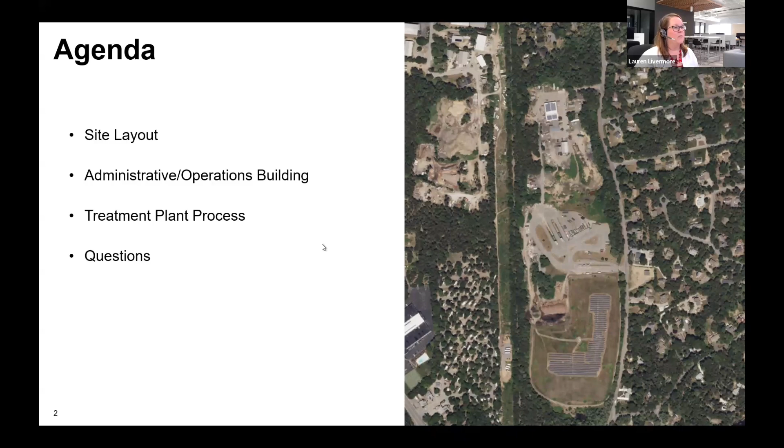Next, we'll go over the administrative slash operations building, which we do have some architectural renderings and some first floor layouts of. Actually, the whole project is going to be done in Civil 3D or Revit, which is a 3D modeling software. So the other buildings will have 3D renderings and isometrics available for town meetings. I don't want to say this town meeting May 5th, but for future meetings, you'll have some nice renderings to share. Then we'll go over the treatment plant process, and then feel free to ask any questions. And of course, feel free to interrupt me if you've got a question. So with that, for the people that are in the room, do you have a hard copy of the drawings?

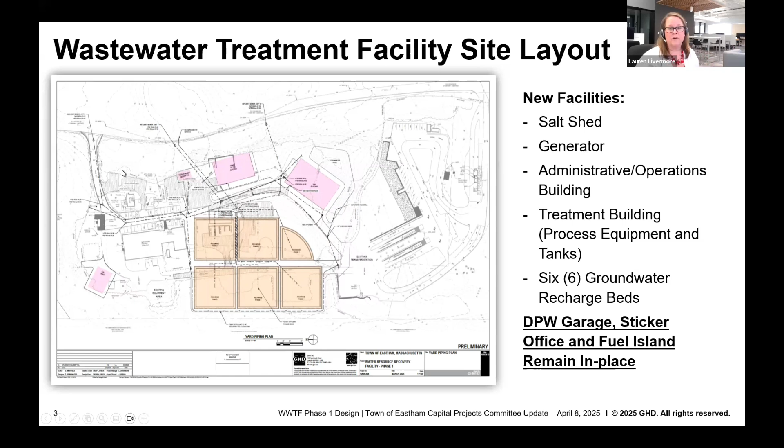So here is our overall layout. Just a note that the DPW garage, the sticker office, and the fuel island will remain in place once this is built. So we've essentially left some space over in this area for the future build out of a DPW facility when you guys decide to do that down the road.

So this is a bit of a zoom in, and to make things a little easier, I put some boxes over it. The existing salt shed is in this general area right here, so we will be moving it over to this corner. This driveway will stay as is and should be an easier in and out and turning for your staff.

We have a generator planned, however, based on our 30% design, we haven't gotten to all the edits. This will most likely move to the other side of the administrative building, just so it's not near the parking, and we have ample room for the DPW facility in the future.

This is our administrative and operations building. This will be the public facing side where the DPW offices will be, where residents can pay their sewer or water bill, so that will be on this side of the building. The other side will be some of our process equipment, filters and disinfection.

Over here will be our treatment building. I have another drawing that will go into a bit more detail, but it essentially has some process rooms on this side, and then open process tanks on the back end over here. There is odor control on these tanks in certain areas - we'll be putting covers on the more odorous areas to prevent that from being a nuisance. And this is our groundwater recharge bed area.

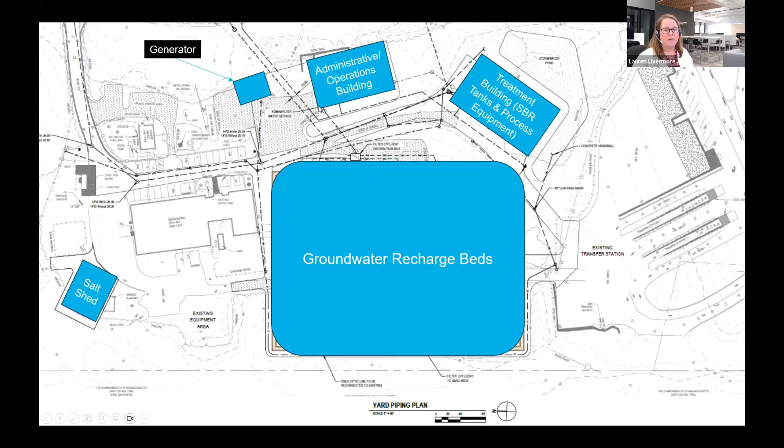So this is our administrative and operations building. As I showed in the last drawing, this shorter part of the building is the public facing side, so that will be this one-story structure over here where the offices for the DPW and the operations team will be. Again, over here is our filter building and other processes. We've got a little overhead door over here to get things in and out.

So these are some of the types of renderings that we'll see that are produced in Revit as opposed to AutoCAD, for those who are familiar.

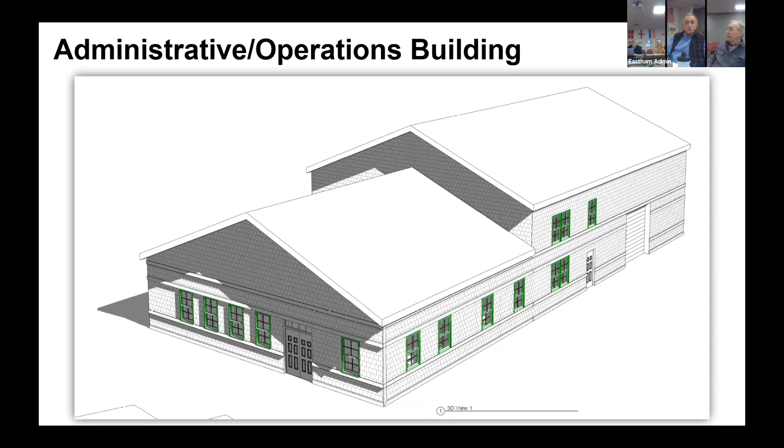From a funding standpoint, are we mixing DPW with the sewer groups, or is that an issue? Operationally for us, it doesn't make much of a difference - I think it's probably a net positive for us. One thing we need to work out is the floor plan, and that's one of the things we took away from the 30% design meeting, making sure it meets our needs. But the concept was to have DPW admin in this building, including water, so you have one spot to go. Does that affect our funding at all? It's not - there might be a piece, strictly theoretically, that we'd have to pay for ourselves that SRF or another entity would pay for, but hopefully it's negligible. It's similar to a building school project where some of the building is preserved - but the current operations for DPW are in that building. We're not talking about everybody, we're not talking about highway staff - we're just talking about administrative staff, so it's literally 2 or 3 offices extra.

We are actually currently working on some of the edits from the 30% design, and had a brainstorming session ourselves with our team. I really was hoping to get those today, but they'll probably be at the end of this week, is what we're anticipating, and I'll forward those to the town.

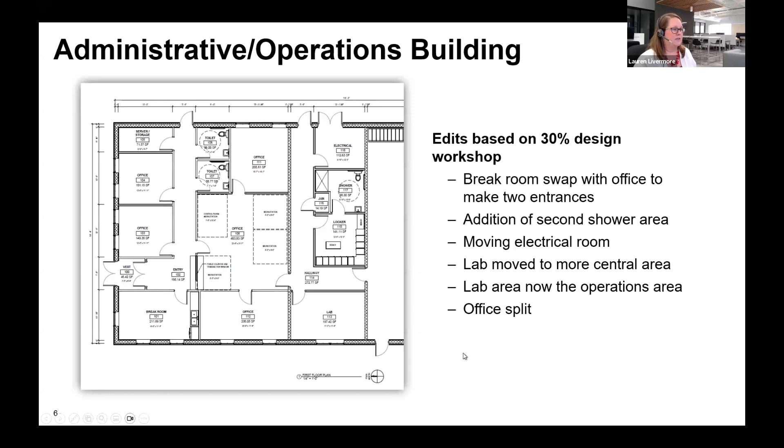One of the things we talked about, which we would like to do anyway regardless of this: if you drive by there, the fencing is a bit old and in disrepair, so we take the opportunity to upgrade everything. As part of this project, we really want to redefine and rehabilitate that whole boundary buffer.

I got a call from someone that lives on the corner of Bracken and Orchard, I think, and they were like, where's this gonna be? Am I gonna see it? Well, the neighborhood is upset, so they've been trying to get together and talking about it.

That's one of my notes - before we go to town meeting, we have to sit down and have a meeting about that. It's hard to say exactly what it looked like, but I think it's important for us to commit to the town. It's a 100-foot buffer. It's not what it ought to be right now, and we're committed to making it better as part of this project.

It will be visible at times based on tree cover and the time of year - vegetation, obviously, in the wintertime. I don't know if there's an opportunity, I'm sure it's something we'll have to go through, but if there's an opportunity to introduce trees that don't lose their leaves, I don't know.

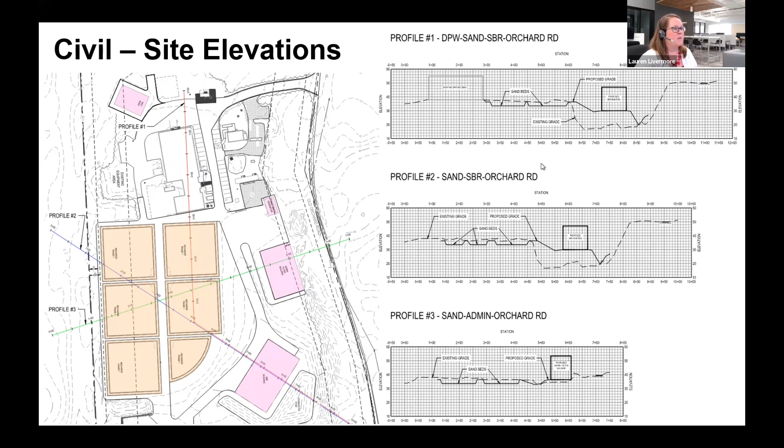Lauren, I saw the floor plan. Without getting into the details, I never had a chance to review this yet, but it looks like you only have one locker room. Is that right? Yeah, so we were trying to save on space, partially for the fiscal aspect. But what we are actually doing instead, we are having a combined locker area that people would grab their clothes out of, or their lunch, whatever they're keeping in there, and then we would have two separate shower facilities.

So what we're looking at is essentially if you moved this whole section up and you put another shower facility here and added a door on the side. If there's a particular request one way or the other, we could add it, but to save on space, we left one locker room because we're not anticipating more than a few operators for this size plant.

I wonder though if the code review would require one for female, one for male. Our architectural staff did look into that, and he was the one that actually suggested this one only. I'd have to get back to you on the specific codes. I know there's been some changes over the years, but these would actually be two gender neutral bathrooms over here. And at this time, he was suggesting this, and we all kind of agreed that it would be better to have two shower facilities. And changing, right?

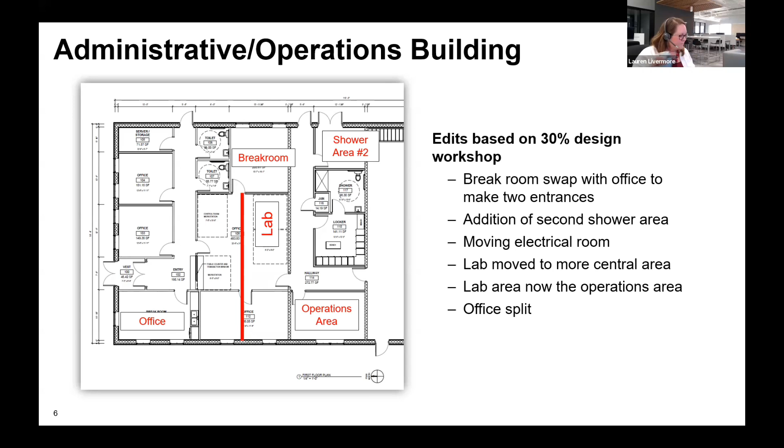Okay. Any other questions on that before I move on to the treatment plant processes? Okay. So this is basically a quick overview of the facility process, and then we'll get into some of the details. Just not knowing everyone's familiarity in the room, we'll just go through it really quick. Obviously, collection system, I think we're all good with that. It's going to collect sanitary sewage from homes and businesses. Lucky in this area, there's not a lot of industrial sewage, or basically none that would be coming in. So it's all domestic sewage that would be entering this treatment plant.

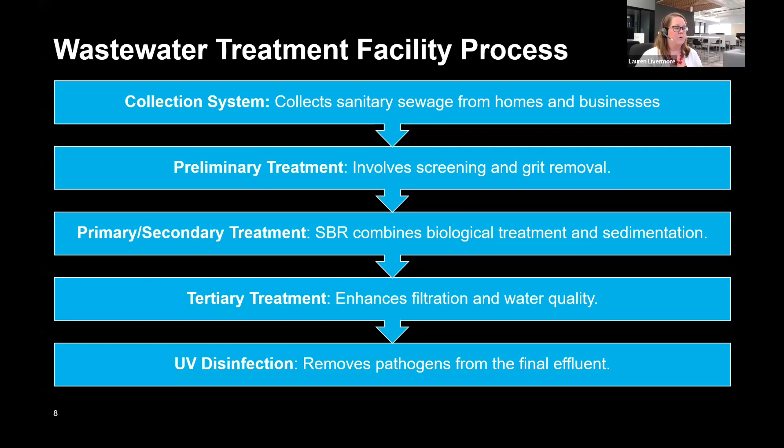So moving on to preliminary treatment. So this is where the screenings removal and the grit removal happens, and I'll get into a little bit more detail on that. And then we have primary/secondary treatment for this proposed treatment plant. This is actually combined in the sequencing batch reactor, or the SBR treatment processes. And I found actually a great little graphic on one of the manufacturer's websites that I'll show to explain how that works. Tertiary treatment is essentially to enhance the water quality and the filtration aspects, to be that final polishing step. And then after that, it goes through a disinfection process, which will be UV disinfection or UV radiation.

So first, to briefly start out with the flows and loads. And again, some of these slides are in the PowerPoint that you have right now. So our design flows are based on the extent of sewered areas that were proposed by the town and Apex for phase 1 and phase 2, those maps that Hillary was talking about. And the treatment equipment needs to cover the range of a minimum day to a maximum day flow. So we need to make sure that the plant will work for times when it's off peak and it's just starting up and there's not a lot of flow coming in. And it also needs to be able to handle the maximum day flow that you would see once you've got all of your areas sewered and you're having a busy summer day.

So then the conveyance equipment, such as the pipes, the pumps, the tanks, needs to be sized for the peak instantaneous. So essentially, if you've got more flow coming down the pipe because everybody flushed the toilet at the same time, your plant needs to be able to hydraulically have the capacity to handle that, so you're not overtopping tanks or anything like that.

And really the reason why I mention that is that obviously we're trying to balance the design of phase 1 versus phase 2. When we had originally looked at this project a few years ago and gone with an SBR system, it was more of a half of the flow would be in phase 1 and half would be in phase 2. So we were thinking 2 SBR tanks for phase 1 and 2 for phase 2 that we would build later. However, with the slightly adjusted phase 1 and phase 2 that was completed last year, we're looking at more of 2/3 in phase 1 and 1/3 in phase 2. So that kind of made us look at some of the concrete structures and things a little bit differently. So you'll see that there is 1 extra SBR tank that we're going to use as an equalization tank right now. And there are some areas where we have the ability to add additional blowers or additional pumps when phase 2 is installed.

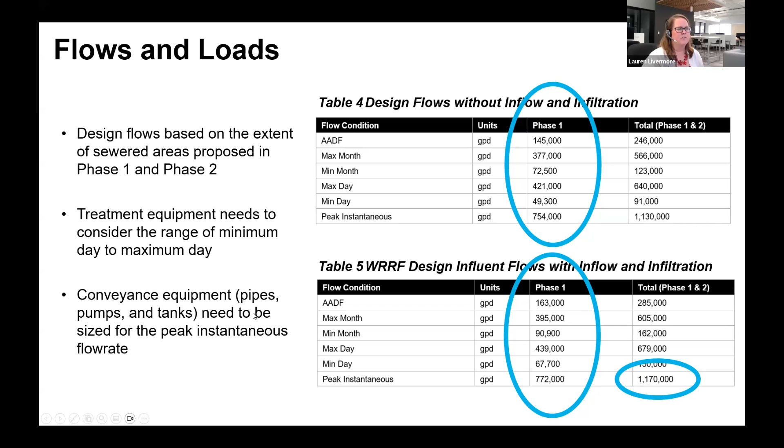So this is what we're focusing on for phase 1: our average annual daily flows, our max month, min month, max day, min day, and peak instantaneous. So this is what we're mainly focused on with the treatment processes for phase 1. However, as I mentioned, since some of the tanks are including phase 2, we need to consider this phase 2 peak instantaneous flow. So just something to think about as we explain the design.

So for preliminary treatment, we will in phase 1 be installing a mechanical bar screen. So that will automatically pick up all the rags and other screening items that need to be taken out of the flow to protect the downstream pipes and equipment.

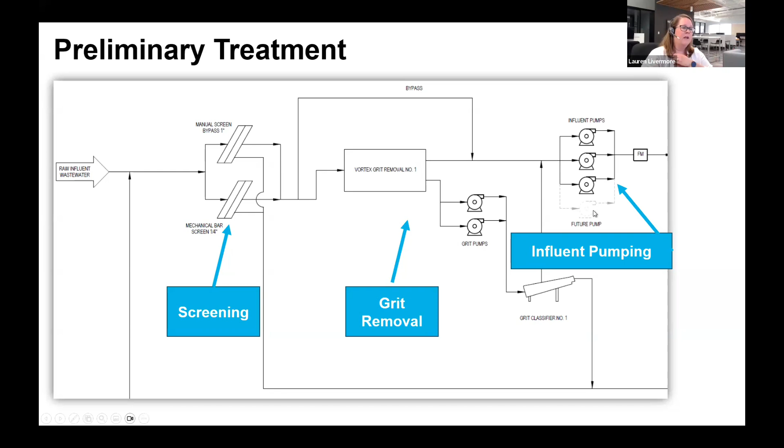And from there, it will go through a grit removal system, which is a vortex grit removal system, and I'll show a picture on the next page. And that one will allow the heavier sand and gravel to drop out and also be taken to most likely a landfill. And then from there, as Ziad and I were talking, it will be pumped up into the secondary treatment process.

Can I ask a question right here? Yeah. So I read about the grit removal and the sludge. And so how many pounds of solids are we going to be trucking off site? Give me, say day, month, give me a number.

Yeah. So say that again. So whether it's a day or a month, what do you think we're gonna be trucking off to a landfill? And that's gonna depend on the time of year too, right? Right, based on the flow coming in. Sorry, for, I don't know, for 100,000 gallons of flow, I guess. Okay. So I think everyone was kind of talking at once. So if I missed it, let me know.

But for the sludge, so when I talked about solids handling, the sludge comes off the aerobic digesters, and that will be in the beginning of phase one. That should be like a sludge hauling tank. So think of like maybe a septic hauler. That'll be 2 to 3 times a week that sludge will need to be hauled off site. And then at full build out for phase two, it'll be approximately 1 truck a day. So seven days a week that sludge truck will come in.

And that's some of the things that we're looking at right now, what other facilities are doing, from land application to sending it to, I believe there's a couple of incinerators in the area as well. So that's how the sludge is handled.

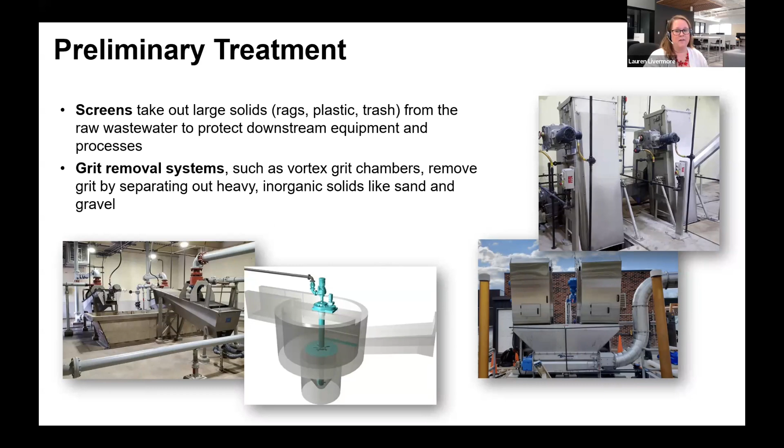Any more questions on that? Okay, I know it's getting 4:30. I hopefully won't take up the next half hour.

So next is our generally secondary treatment process, but really an SBR system does have sedimentation in it as well. So if you look on the process flow diagram, we have the flow being pumped up to our pre-equalization tank, which is actually the third SBR basin for the future, but we'll have an added benefit right now of being able to accommodate differing flows as the treatment plant and everything from the collection system comes online.

So we have our 2 sequencing batch reactor tanks. We do have some chemical feed to help in settling out some of the solids. And from there, we have some of the sludge pumped to the aerobic digesters, and then the rest heads off to a post-equalization tank, which I'll show next. So I found this visual explanation of what an SBR system does, in case you're not aware.

So essentially, you put sludge into an activated sludge process. In here are essentially all these bugs that eat the organic material in the sludge. And when you turn on the blowers, you need to have oxygen for the bugs to consume the organics. Essentially, they use that as fuel. And then when you want the system to go through its cycle and allow the sludge to settle out, that's what they're calling clarification. So you're allowing your sludge to settle out.

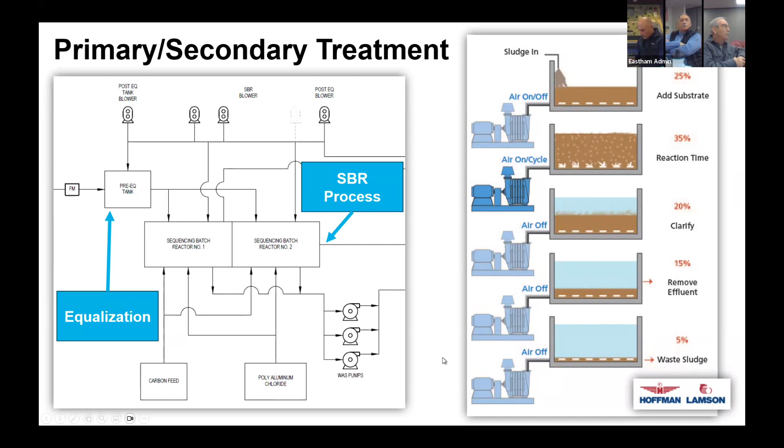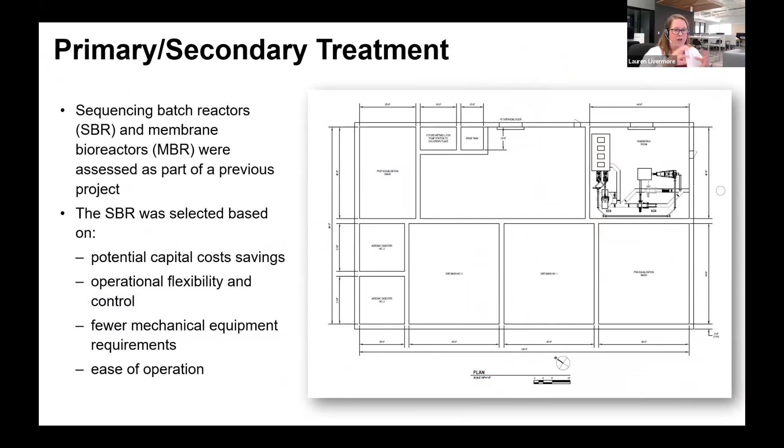And then it goes to those are the same digesters, those big things I see at Deer Island? No, these are much different. Those are probably what you're saying are anaerobic digesters. These are aerobic digesters, so with oxygen. So these digesters are actually right here.

So this was our headworks room where we had the screening and grit, and then it would get pumped up into these SBR tanks. So here's what we're calling our pre-equalization basin, to have this extra tank for phase 2, and also to be able to use it as kind of a swing basin right now to help with flows that are coming into the plant. And then that would go over into your main 2 SBR tanks. Again, they can fill and go through the process.

And then the sludge gets pumped into these 2 aerobic digesters. And they would most likely have a fiberglass cover on them that would be connected to the odor control system. And once this SBR tank goes through its process, it will go to the post-EQ tank and then gets pumped up into the filter building.

So this building was actually maybe turned around if we were looking at the plan. These tanks would be, I don't want to say open because we might be covering them for odor control, but this would be an actual building up here, and this backside would be the tanks. And we need to have an area for the sludge truck. They would come and take the sludge from this area right here. And this process equipment room will have blowers, with space for additional blowers for phase 2, as well as some of the chemical equipment that we'll need.

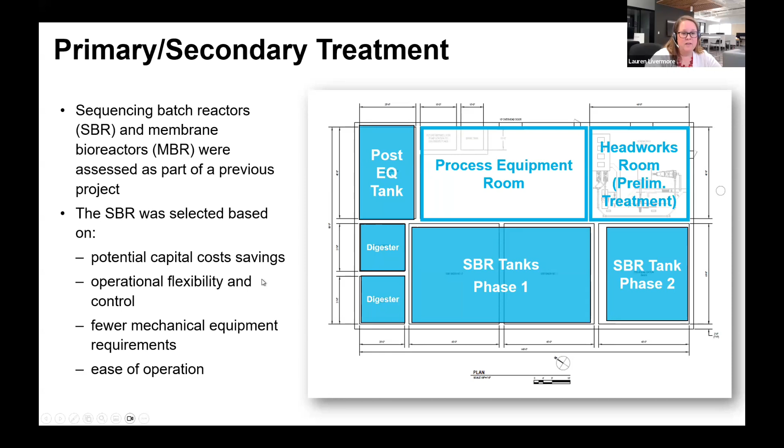Any questions on that? I'll try to keep going. Okay. So tertiary treatment. So we talked a little bit about that. So on that previous page, our post-EQ tank on the drawing, that's right here. And from that point, it'll get pumped up into our cloth media disc filters for tertiary treatment.

And essentially what these do are filter out some of the remaining suspended solids and other constituents of the wastewater so that the plant can meet its effluent limits. We're also looking into, as I mentioned before, we might have some intermediate pumping to be able to get through an activated carbon system for the removal of PFAS. But we're still working on a few of the details here.

The SBR plant by itself is expected to meet some of the permit limits. But to make sure that happens, these extra polishing steps are something that are used. And carbon actually has the ability to take out some other constituents like PFAS. That's what they use on the drinking water side, GAC systems, or granular activated carbon.

We'll have a plant water system that will be able to provide some of the water for certain processes, so that you won't have to use the water that you're just pumping. We'll be able to reuse some of that on the site for areas where we don't need potable. And then we have our UV disinfection system. And so to get in some pictures of that to make that a little easier.

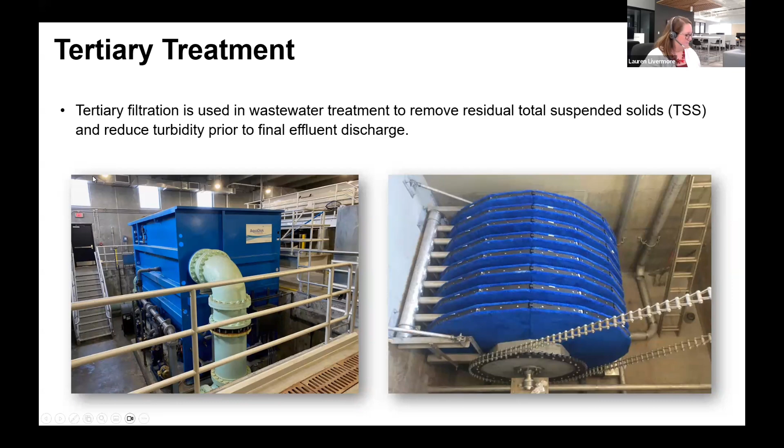I just had a quick question on the prior screen. Yep. The carbon unit, can you add to that in the future if need be? Will there be enough room to increase the size of that? I want to say yes. Are you saying for like future parameters? Yeah, I'm just thinking of future requirements that might come down where we know carbon is one of the solutions.

So right now we're looking at a couple different options, and it does take up a good amount of real estate, but we could allow for additional space in the building to be able to accommodate that in the future, like leave a little extra. I think it would make sense. Don't quote me, but I think the tanks are not short, and they're not small, and I can't remember how many we need. Again, we're looking at 2 different options. The one option we wouldn't necessarily need to pump, but the other option that's a little bit more condensed as far as a footprint, we would have to pump into. Just thinking about the future. Might as well do it now.

Based on Hillary's question, do you normally design a certain percentage increase for future regs that come through? In use of vessels, I would imagine, right? So right now there's not actually PFAS regulations that we are able to design to. And there's some debate on whether you go after the wastewater treatment plants, since it's actually like a pass through, or if you go after municipalities that might have significant industrial users, SIUs or CIUs, that might actually be putting PFAS in the water.

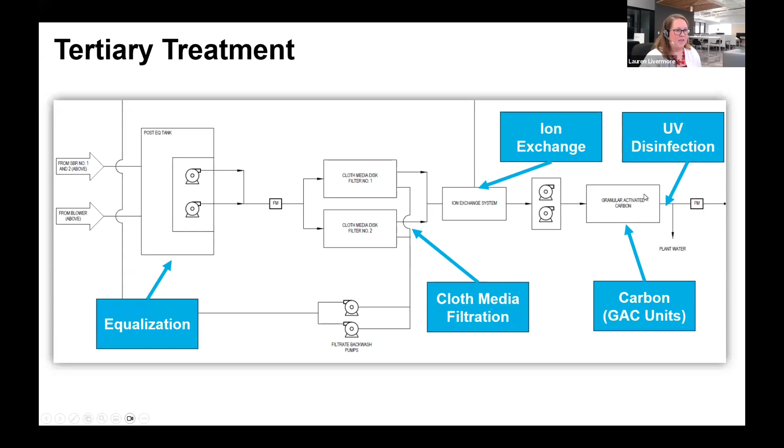Okay, I was going through some of the pictures. So those are our filters. And then for the 30% design, I kind of just showed these contained units, but there really are a bunch of different options for UV disinfection. I'm anticipating for our system it's going to be one of these. So this is just one brand out of many, just trying to show some pictures for clarity.

Some of the larger facilities have the ability to have a larger channel - that might be in one of the process buildings. There's the potential for the UV lamps to be vertical. Just to back up for those who don't know - UV is a disinfection process that inactivates viruses and pathogens from replicating or infecting. So in theory, the bug is still in there, but it's just inactivated, as opposed to chlorine disinfection or other chemicals that are used.

So this is a potential way of installing it - the lamps are put in a more vertical or angled fashion. There's these Trojan UV units you could stick in as well, a number of banks with a horizontal lamp. Or you can have a smaller unit in a channel, more of a steel open channel. Based on the size of this treatment plant, we might be looking at something more like this, or a closed vessel system. So our team is finalizing that design.

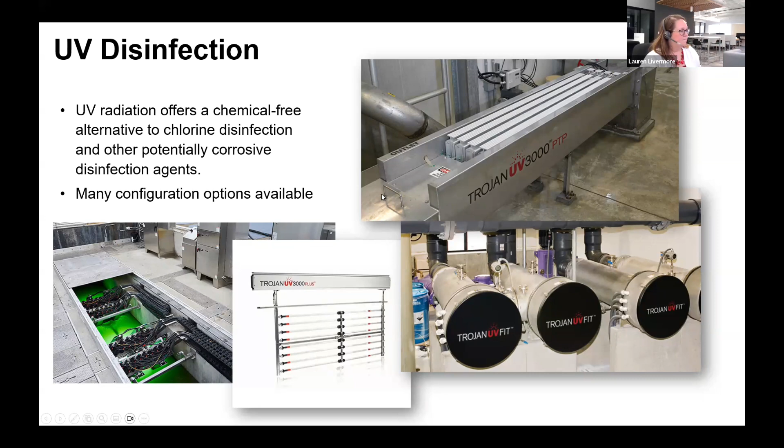So last, after disinfection, it will go to our effluent distribution box and over to the recharge beds. If you remember from the initial site plan, we've got 5 recharge beds of the same size, and then one that's a little bit smaller, just to make as much use of the available land as possible to get our treatment in there. So there was a lot of work that went into the design and eventually the permitting of the effluent sand beds.

That's a hydrogeo report that we are almost finalized. I know the town reps - Rich, Jackie, and Hillary - have seen a lot of our progress on that as we went through some of those iterations of the model. This basically shows how much this particular land area can accept for wastewater recharge. We had our test pits and perc tests completed, I want to say middle of last month, and the DEP rep came out and was very happy with the soils he saw. So we're on a good path there.

So those are some of the next items coming down the pike to the group. There was a number we were trying to hit per day. Those 6 beds will cover the amount of effluent we need for both phase 1 and phase 2 on a daily basis. What the Mass DEP looks for is 5 gallons per day per square foot, and we thought we could go to 9.

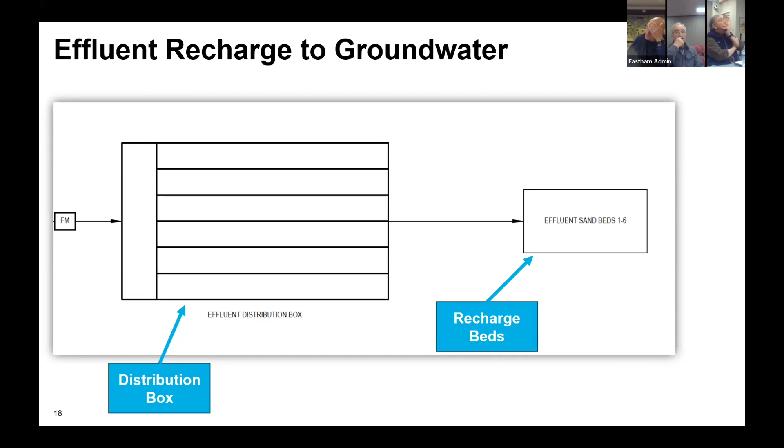We did start mentioning other sites, like I just said, potentially Children's Place. I think in the original scope of work, it even presented the different sites that were looked at for the treatment plant itself. So I guess, to answer your question, yeah.

Sorry, go ahead. I think Fred was asking if the treatment plant currently can accommodate future phase 1 and future phase 2. The 700,000 that they're talking about will stay on this area, this site, correct, for this phase, right? So I believe — I want to check into this — but I believe almost all of phase 1 could go onto the DPW site.

I think we are working on getting the final data from the wetland specialist to see how the mounding could affect that one wetland. That's really the key factor — the crux, the critical success factor.

So we had gone through a bunch of iterations with the modeling to see how it would be affected at different flows. So the hydrogeo report definitely has that in there. I don't have it memorized, so let me get back to that. But it is designed for 5 gallons per day per square foot and would be the bulk of phase 1.

And again, it's going to be a slow fill as the collection system is built out and all the different houses and businesses connect. So you've got time to see how the recharge beds are doing, and similar to other municipalities, ask for additional recharge flow. Right, but your hydrogeo report is only for phase 1. Correct.

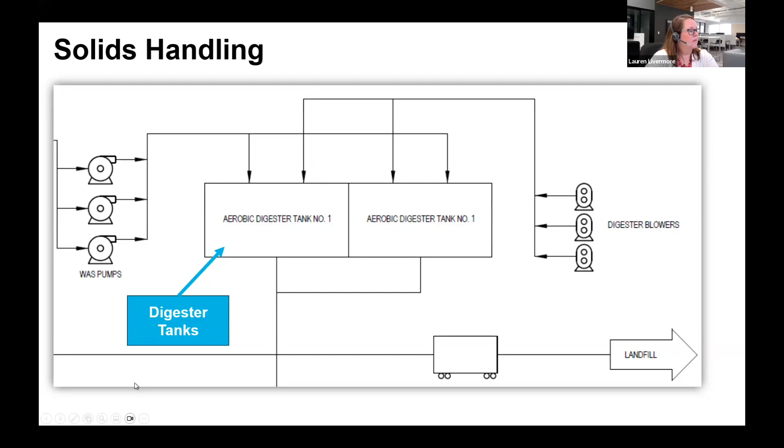And this actually had another line to it. So this is what would be hauled off by a sludge hauler, either to incinerator or land application, or whatever's agreed upon. And that's all I had.

Thank you. You're welcome. Any questions, anything I didn't answer? I know we're getting close to 5, so I don't want to take too much time up. I guess I'll be a pain in the butt a little bit.

When we're talking about what the recharge beds need to be sized for, it is—I forget who just said it—80% of max day. So you're not actually sizing the beds for, what was it, 750, like a peak instantaneous. You're sizing the treatment that will be conducted by the beds for 80% of max day. But typically you're going to see a max month number, or average daily flow number, which is a little less. So that's why there's a lot of different calculations that, depending on the process you're looking at, use different flow conditions to be able to size the process.

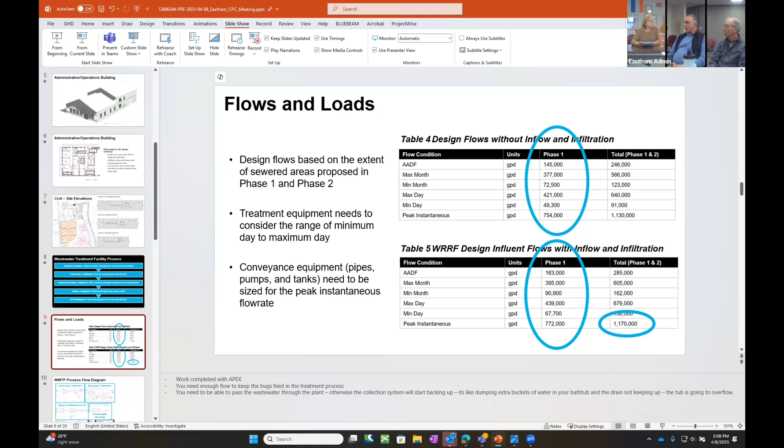We ready? Good. All right. I'm not sure if it's for this, but where in all of this, because you're gonna get asked this at whatever town meeting it gets socialized, where does Tea Time figure in all of this? It's on the route. In terms of what phase it is? Phase one. Okay, because that's gonna come up.

And then I guess my second question, or just comment for you as you're figuring things out as you socialize. You've got initial sewer hookups, you've got quarterly or annual sewer fees, whatever that is, on the plus side, and then you've got the operating side. So maybe check with other towns to see what kind of numbers, how they shake out, do they equal? I'm just thinking about other things you will get asked.

And Rich has set up the wastewater stabilization fund, which we've contributed to for 3 years. Honestly, I'd like to have about double what we have. We have enough now to start up the plant probably, because that takes at least a couple of years to ramp up, if not longer. So that operation will need to be subsidized. And I'd like to have enough in there to smooth out the debt service as it comes on board too. But we just don't have it yet.

And what kind of lead time? I know it's kind of a phased process in Orleans where a lot of the businesses are hooking up. There's gonna be a hard date at some point, but what is that period? Usually the huge problem has been, they give you a year to hook up, the resident, right? But then they can't find contractors, everyone's so busy. It's backed up.